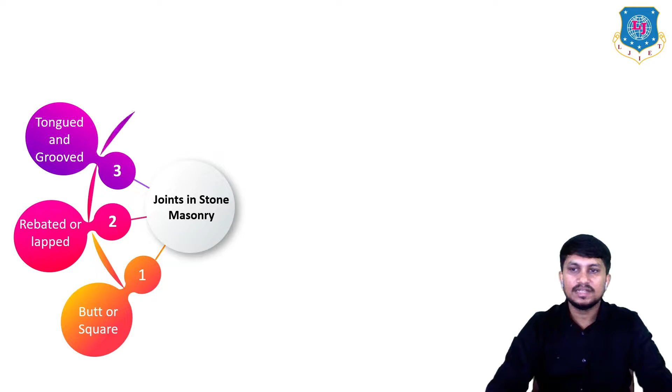First is butt or square joint. Second is rebated or lap joint. Third is tongued and groove joint. Fourth is table joint. Fifth is saddle or water joint. Sixth is rusticated joint. Seventh is plug joint. Eighth is dowel joint. And the ninth is cramp joints. These are the various types of joints in stone masonry.

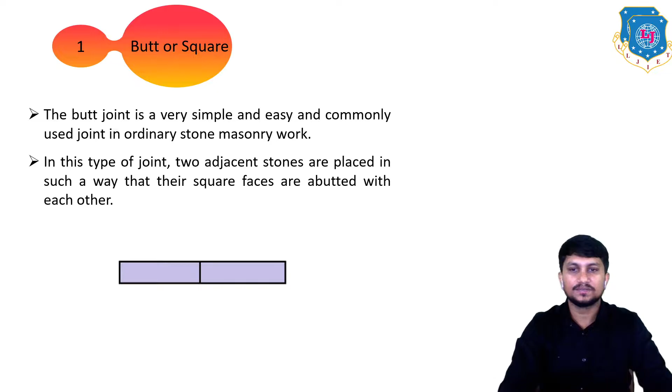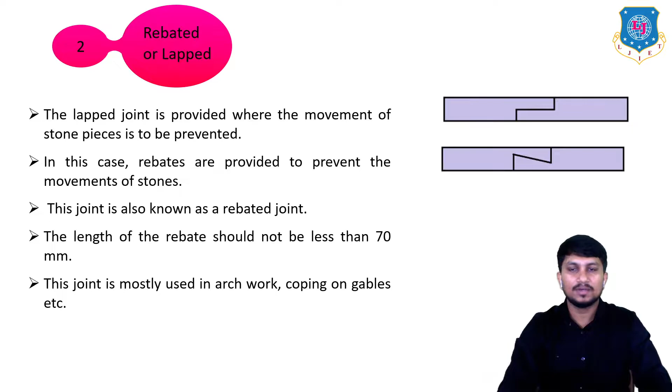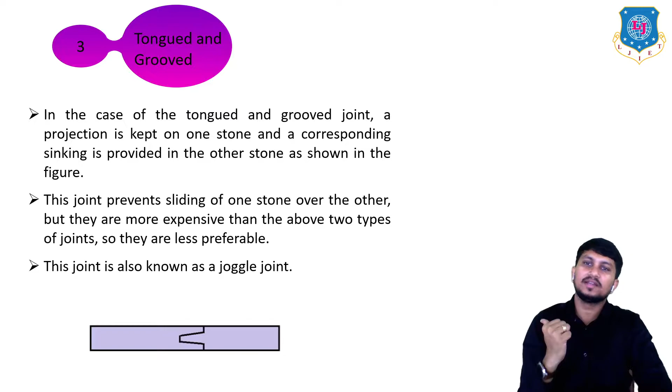Next type of joint is tongue and groove joint. In the case of tongue and groove joint, a projection is kept on one stone and a corresponding sinking is provided in the other stone, as shown in this figure. This joint prevents sliding of the one stone over the other stone, but they are more expensive than the above two types of joints, so they are less preferable than the above two types. This joint is also known as joggle joint. This is how tongue and groove joint can be done. That's all about tongue and groove joint.

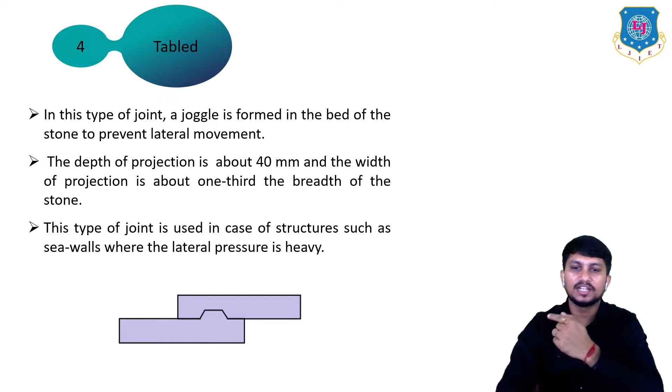Next is table joint. In this type of joint, a joggle is formed in the bed of the stone to prevent lateral movement. The depth of projection is about 40 mm and the width of projection is about one third the breadth of the stone. This type of joint is used in the case of structures such as sea walls where the lateral pressure is very heavy. This is how table joint can be done.

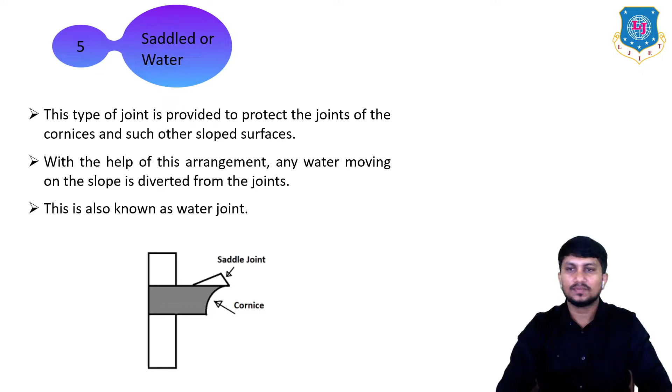Next type of joint is rusticated joint. Sometimes the margins or edges of stones used for plinth, quoin, outer wall of lower stories, etc., are sunk below the general level. The term rusticated is used to indicate such type of masonry. This joint may be of different types such as channel joint, V joint, molded joint, and channeled and V joint, etc. These are the various types of rusticated joints.

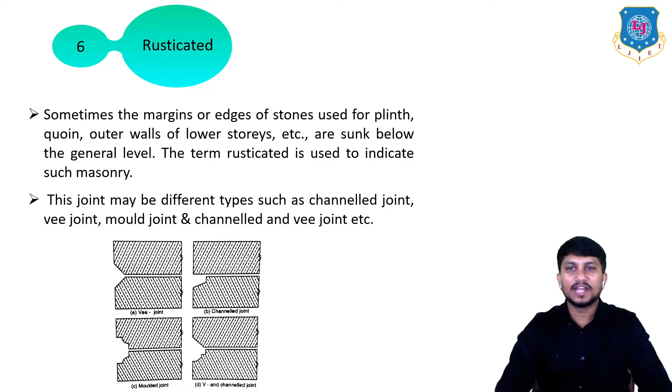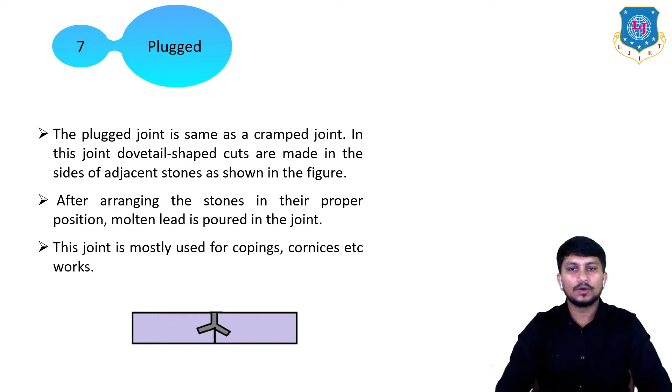Next is plug joint. The plug joint is similar to cramp joint. In this joint, dovetail-shaped cuts are made in the sides of adjacent stones, as shown in this figure. After arranging the stones in their proper position, molten lead is poured into the joint. Molten lead is a liquid which is poured into this joint for the strengthening of this joint. This joint is mostly used for copings, cornices, etc. works.

Okay, these joints prevent unwanted displacement of stones. When dowel joint is provided for columns, it is known as bed plug. Okay, so this is called as dowel joint.

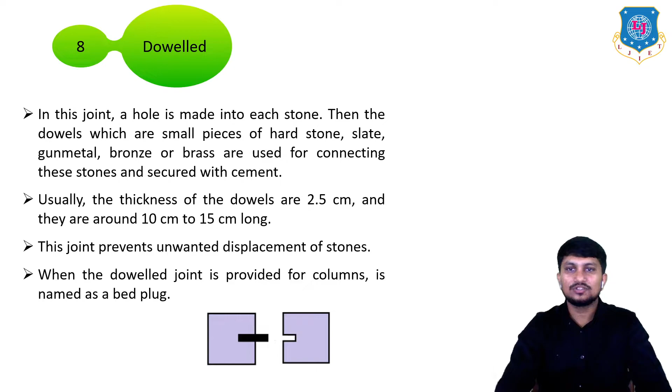And the last type of joint is called as cramp joint. In cramp joint, the holes are made on adjacent stones which will be a dovetail shape like this. Okay. In this case, to connect these stones, cramps are used instead of dowels. Okay. This is how cramps look. Okay. The cramps are pieces of non-corrosive metal like gunmetal, copper, etc.

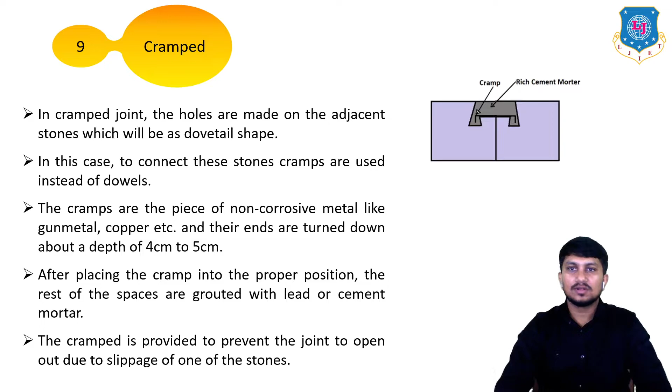And their ends are turned down to a depth of about 4 centimeter to 5 centimeter. After placing the cramp into the proper position, the rest of the spaces are grouted with lead or cement mortar. The cramp is provided to prevent the joint from opening out due to slippage of one of these stones. Okay, this is called as cramp joint. That's all about the various joints in stone masonry.

Now let's see the classification of stone masonry. This can be classified into two categories, rubble masonry and ashlar masonry. First of all, we will see rubble masonry. This is the stone masonry type where stones employed are either undressed or roughly dressed. Okay, this masonry construction does not have a uniform thickness.

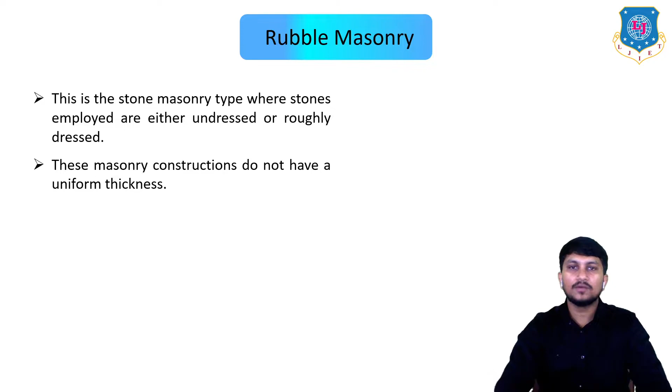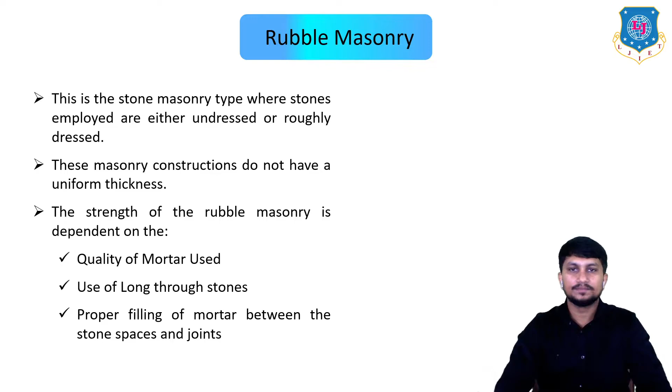The strength of the rubble masonry mainly depends on these three factors: quality of mortar used, use of long through stones, and proper filling of mortar between the stone spaces and the joints. Okay, this rubble masonry may be further divided into six types. First is coursed types, in which there are also subcategories like one-sort, two-sort, three-sort types. Second is uncoursed rubble masonry. Third is random masonry, in which also there are two types. Then dry rubble masonry, polygonal rubble masonry, and flint rubble masonry.

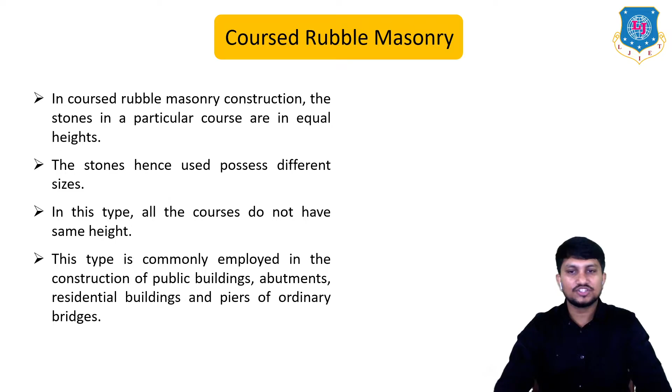Okay. First of all, we will see coursed rubble masonry. In coursed rubble masonry construction, the stones in a particular course are of equal heights. The stones hence used possess different sizes. In this type, all the courses do not have the same height. This type is commonly employed in the construction of public buildings, abutments, residential buildings, and piers of ordinary bridges. Okay, in which there are three types.

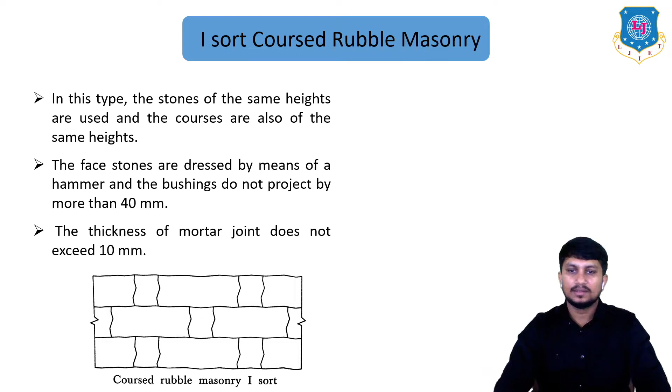First is one-sort coursed rubble masonry. In this type, the stones of same heights are used and the courses are also of the same heights like this. Here, the stones are of same height and the layers are also of same height. The face stones are dressed by means of a hammer and the bushings do not project by more than 40 mm. Okay, the thickness of mortar joint does not exceed 10 mm. Okay, this is called as one-sort coursed rubble masonry.

Next is two-sort coursed rubble masonry. It is similar to one-sort except these following four points. The first is the stones to be used are of different heights. You can clearly see there are a number of stones which are of different heights. The courses need not be of equal heights. In one-sort coursed rubble masonry, all the courses are of same height. Here in this case, there is no such case.

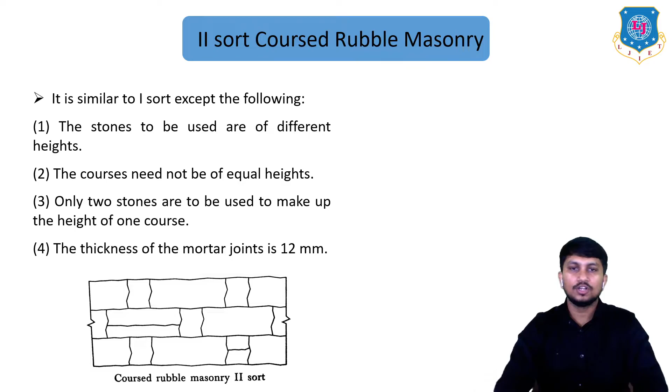Okay. Third is only two stones are to be used to make up the height of one course. Okay. In one layer, only two stones can be used in this type of rubble masonry. Okay. And the thickness of the mortar joint is about 12 mm. Okay. This is called as two-sort coursed rubble masonry.

Next is three-sort coursed rubble masonry. This type is similar to one-sort except these following four points. First is the stones to be used are of different heights, the minimum height being 50 mm. Here the compulsion of height is given. Okay. Second, the courses need not be of equal heights. Okay. Here in this case also it is similar to two-sort coursed rubble masonry.

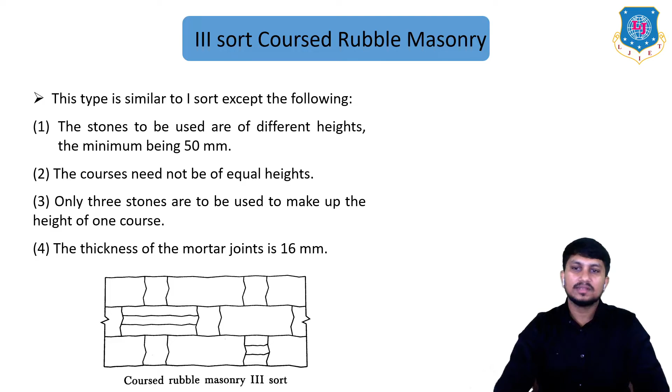Third, only three stones are used to make up the height of one course, and the thickness of the mortar joint is about 16 mm. These are the four points by which coursed rubble masonry three sort differs from coursed rubble masonry one sort. Okay, that's all about coursed rubble masonry.

Now let's see uncoursed rubble masonry. This is how uncoursed rubble masonry looks like. In this type, the stones are not dressed, but they are used as they are available from the quarry, except knocking out some corners. The courses are not maintained regularly, like this. Here there are no such layers.

The largest stones are laid first, and the spaces between them are then filled up by means of spalls or snecks, which is one type of smaller portion of stones. The wall is brought to a level every 300 mm to 500 mm. This type of rubble masonry, being cheaper, is generally used for the construction of compound walls, godowns, garages, labor quarters, etc. This is called uncoursed rubble masonry, where there are no such regular layers.

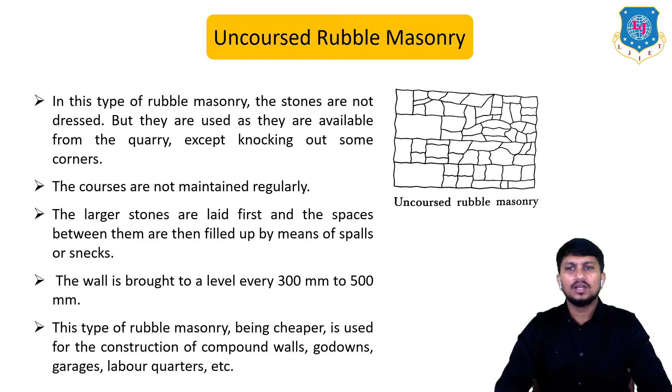Next is random rubble masonry. This is how random rubble masonry looks like. In this type, stones of irregular sizes and shapes are used. Here in this figure, you can clearly see the stones are of irregular sizes and shapes. These stones are arranged so as to have a good appearance. If we compare this with uncoursed rubble masonry, random rubble masonry has a better appearance, for which more skill is required to make this type of masonry structurally stable.

If face stones are chisel dressed and the thickness of mortar joint does not exceed 6 mm, it is known as random rubble masonry one sort. There are two types here: one sort and two sort. If the mortar joint does not exceed 6 mm, it is called random rubble masonry one sort, using chisel dressed face stones. In random rubble masonry two sort, hammer dressed stones are used, and the thickness of mortar does not exceed 12 mm. This is the difference between one sort and two sort random rubble masonry.

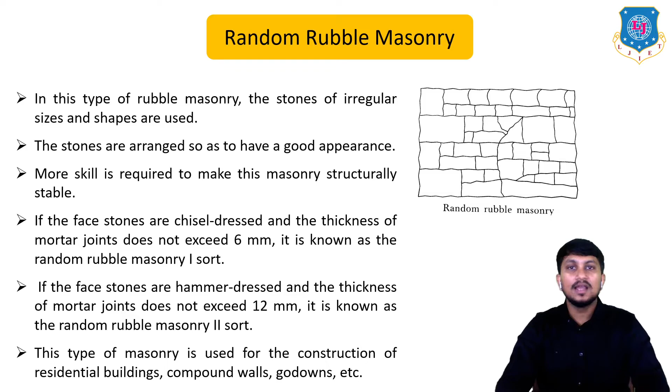This type of random rubble masonry is used for the construction of residential buildings, compound walls, godowns, etc.

Next is dry rubble masonry. This is similar in construction to coursed rubble masonry three sort, except that no mortar is used in these joints. This type of construction is the cheapest, but it requires more skill in construction. It is extensively used for compound walls, pitching on bridge approaches, retaining walls, etc., where there is no use of mortar, which is why it is called dry rubble masonry. In order to prevent displacement of stones and to make the work more stable, two courses at the top and about 500 mm length at the ends are sometimes built in mortar.

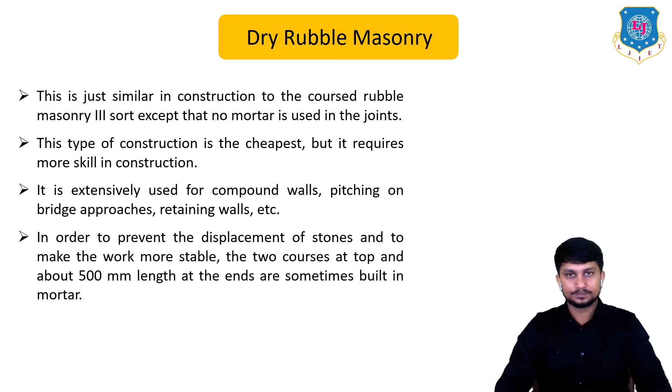Next is polygonal rubble masonry. This is how polygonal rubble masonry looks like. In this type, the stones are hammer dressed and the stones selected for face work are dressed in an irregular polygonal shape. Thus, the face joints are seen running in an irregular fashion in all directions. It is to be noted that more skill is required in the construction of this type. As the stones are of irregular shape, it is difficult to adjust them with regard to stability and appearance of the work as a whole, so the labor work and labor cost are very high.

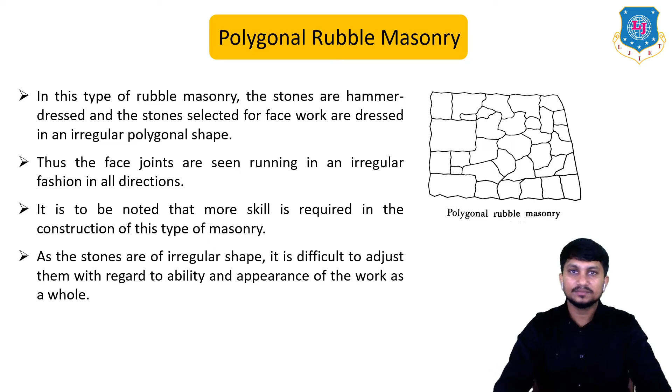Next is flint rubble masonry. In this type of rubble masonry, the stones used are flints, which are irregularly shaped nodules of silica. The width and thickness vary from 80 mm to 150 mm, and the length varies from 150 mm to 300 mm. The stones are extremely hard, but they are brittle and therefore break easily. The face arrangement may be either coursed or uncoursed.

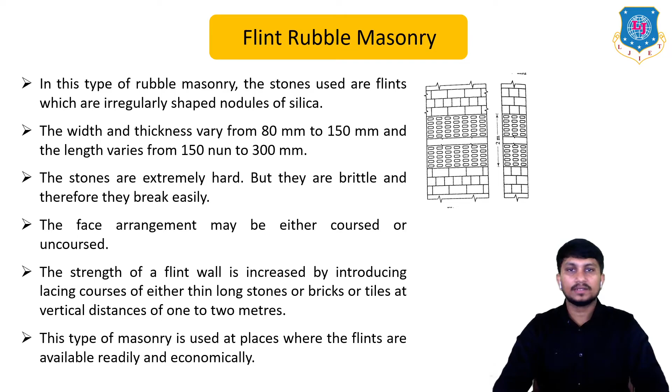The strength of flint wall is increased by introducing lacing courses of either thin long stones, bricks, or tiles at vertical distances of 1 to 2 meters, like this. This type of masonry is used where flints are available readily and economically for construction work. That's all about the first type of stone masonry, which is rubble masonry.

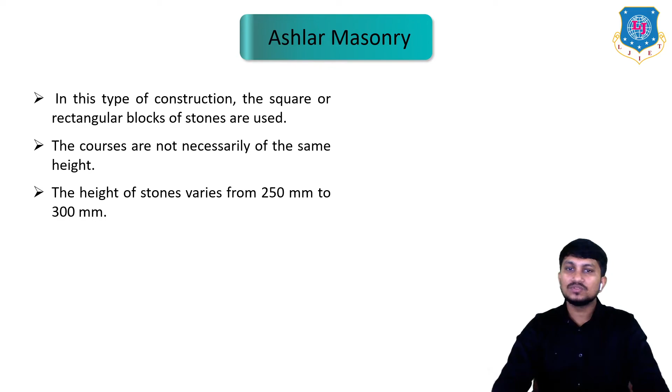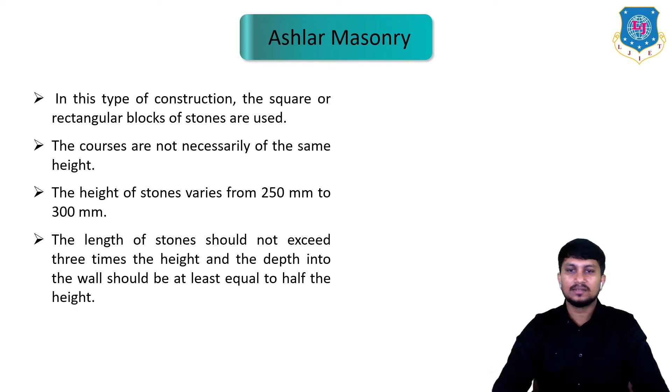Now let's see the second type of stone masonry, which is ashlar masonry. In this type of construction, square or rectangular blocks of stones are used. The courses are not necessarily of the same height. The height of stones varies from 250 mm to 300 mm, and the length of the stone should not exceed three times the height, while the depth into the wall should be at least equal to half of the height. Ashlar masonry is of five types: fine ashlar masonry, rough tool ashlar masonry, rock or quarry faced ashlar masonry, chamfered ashlar masonry, and blocking course ashlar masonry.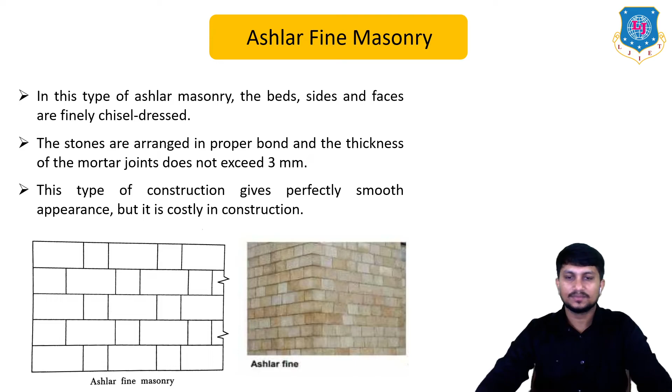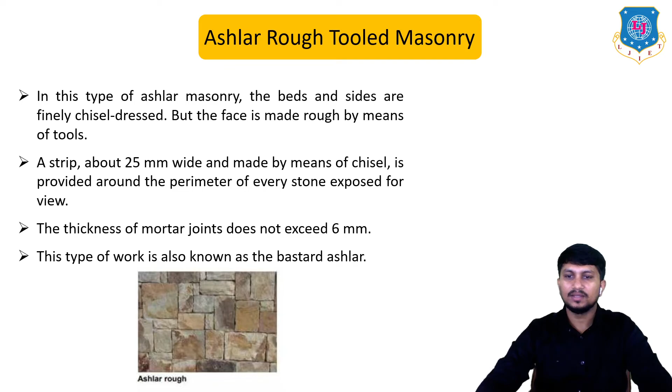Next type of ashlar masonry is rough tooled. In this type, the beds and sides are finely chiseled, but the face is made rough by means of tools. A strip about 25 mm wide, made by means of a chisel, is provided around the perimeter of every stone exposed for view. The thickness of mortar joints does not exceed 6 mm. This type of work is also known as bastard ashlar masonry. This is how ashlar rough tooled masonry looks like.

Next type is rock or quarry face ashlar masonry. A strip about 25 mm wide, made by means of a chisel, is provided around the perimeter of every stone exposed for view, as in the case of rough tooled ashlar. This is how ashlar rock or quarry face masonry looks like, but the remaining portion of the face is left in the same form as received from the quarry. Only projections on the face, known as bushings, exceeding 80 mm, are removed by the hammer. This type of construction gives a massive appearance like this.

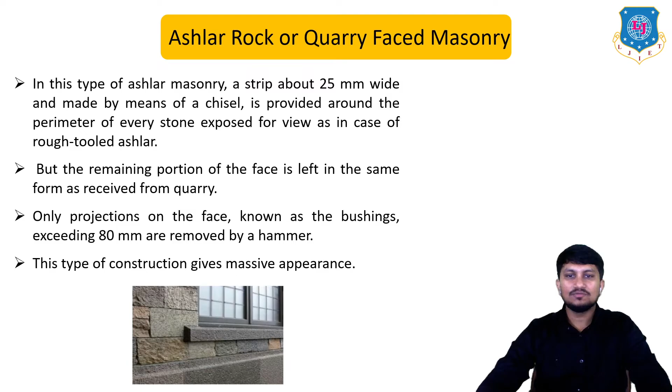Next type of ashlar masonry is chamfered ashlar masonry. In this type, a strip is provided as shown in the figure, but it is chamfered and beveled at an angle of 45 degrees by means of a chisel for a depth of about 25 mm. Another strip of 12 mm wide is then provided on the remaining exposed face of the stone, and the surface inside this strip is left in the same form as received from the quarry. The large bushings projecting more than 80 mm are removed by the hammer. The neat appearance of a grooved joint is obtained with this type of construction. This is how ashlar chamfered masonry looks like.

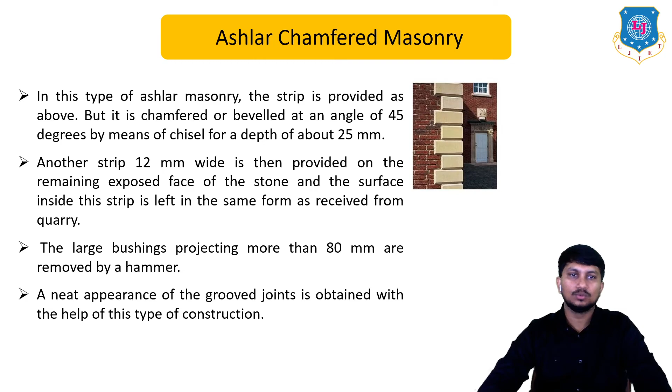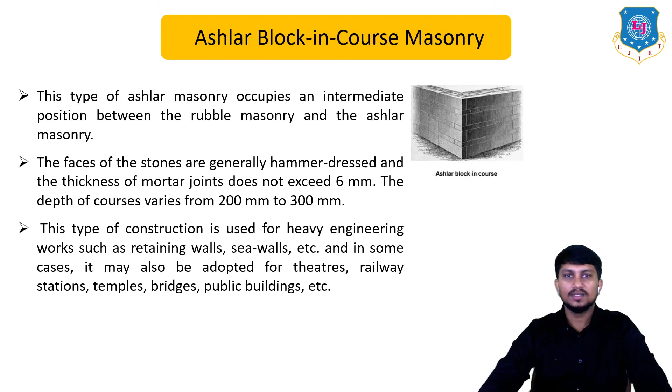The last type of ashlar masonry is block-in-course ashlar masonry. This type occupies an intermediate position between rubble masonry and ashlar masonry. The faces of stones are generally hammer dressed, and the thickness of mortar joints does not exceed 6 mm. The depth of courses varies from 200 mm to 300 mm. This type of construction is used for heavy engineering work such as retaining walls and sea walls, and in some cases it may also be adopted for theaters, railway stations, temples, bridges, and public buildings. This is called ashlar block-in-course masonry. That's all about the various types of ashlar masonry.

That's all about the classification of stone masonry. Thank you for watching.